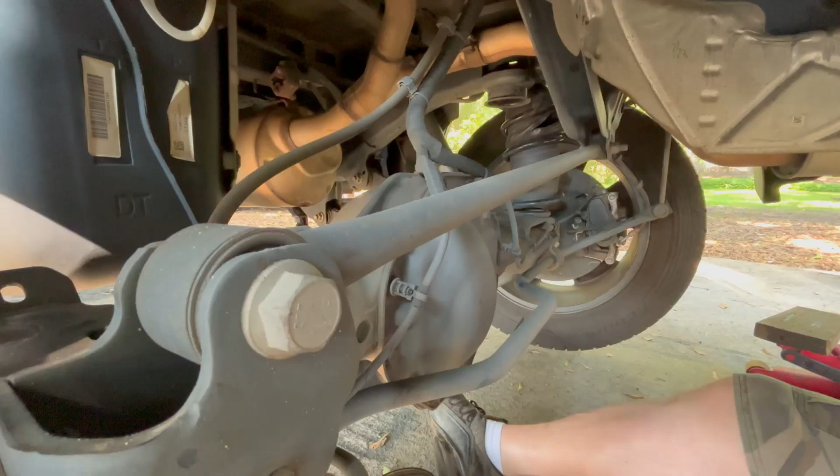Okay, so I'm gonna have to be down in here, but basically it goes from here to here, and I don't have a bump stop on this side. This side does, but it doesn't anymore. Took that out, but I gotta cut these.

Let's get you back out of here, and you can see the hole in this. Yeah, you can see it. This one never broke, never popped, but we put two on this side, two different ones, and they both popped.

So this is the kit we got from Air Lift, LoadLifter 5000 adjustable air springs. Right now we didn't get the air compressor. You saw in the last video where I worked on this, I put the air nozzle in the fuel tank or fuel door, so that's where we're going to keep it for now. There is a future kit so you can do it manually or electronically.

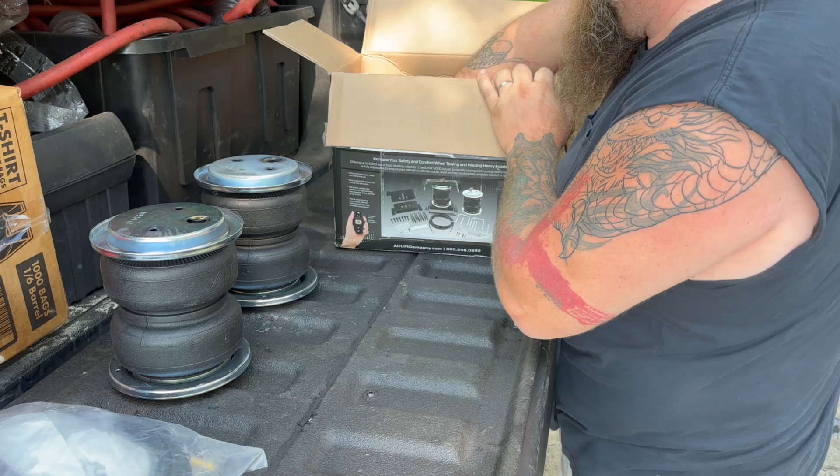Let's get in here and open this up and see what's going on. There's one airbag, there's two. There's one top bracket, that's one bottom bracket, and there's another bracket. Not sure where these go.

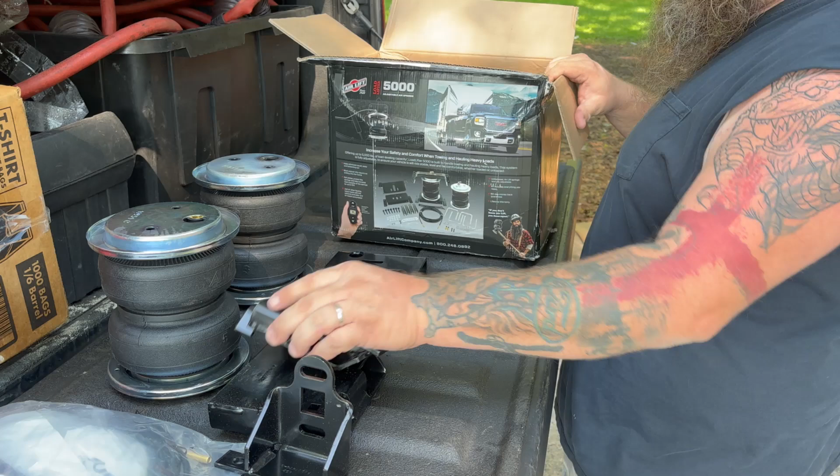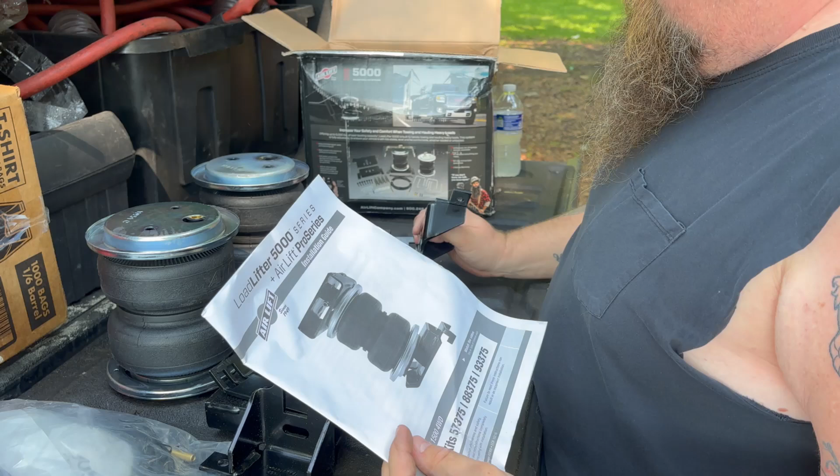You know, this one goes up, this one goes down, because the plate goes and it sits and it locks right there. Pretty sure I put bolts through here. So let's get that out of the way, get the directions. Okay, yes, I've never done one of these, so I'm gonna have to look at the directions. Let's get this bag open.

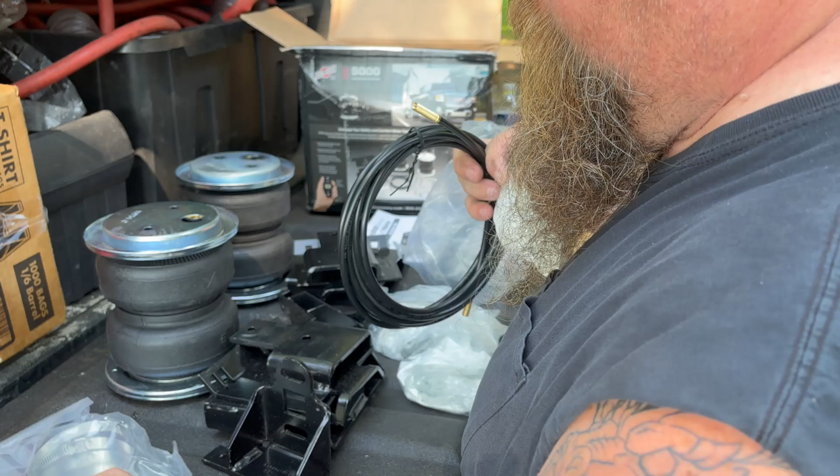So whenever you see these, that means these go up in a spot you can't get into. So you put these in there, you feed it up through, and then pull it down, and then your bolt goes on this, on the threads.

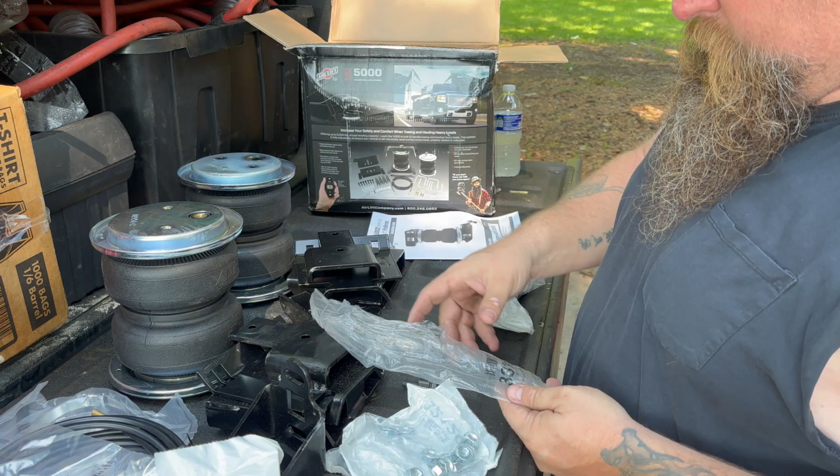There's the two valves that go right there. Not sure what that is, but we'll see. There's some nuts, there's bolts, I'm not sure what quite this goes for. It was just loose in there. Let's put that back in there because that might be a number we need. Okay.

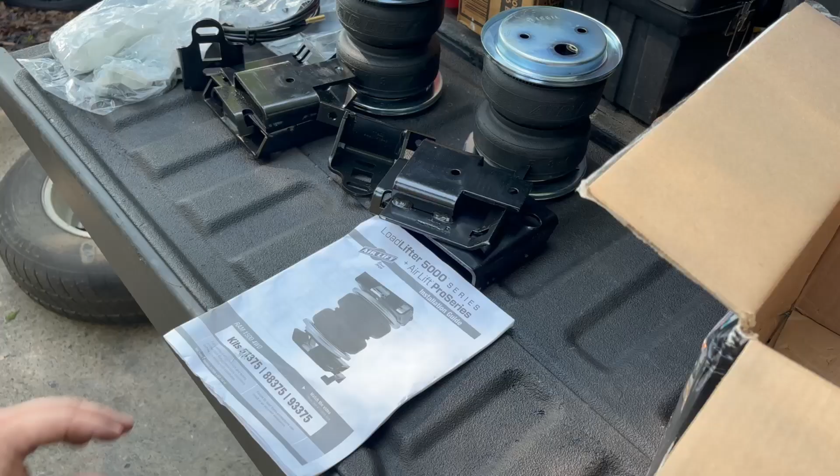I want to keep them in the bags because I'm pretty sure in the washers, lock washers, bolts, okay. I'm gonna put them back in here because they're all in that bag, or in that number, so I know the difference between this number and that number. Okay, get that out of the way.

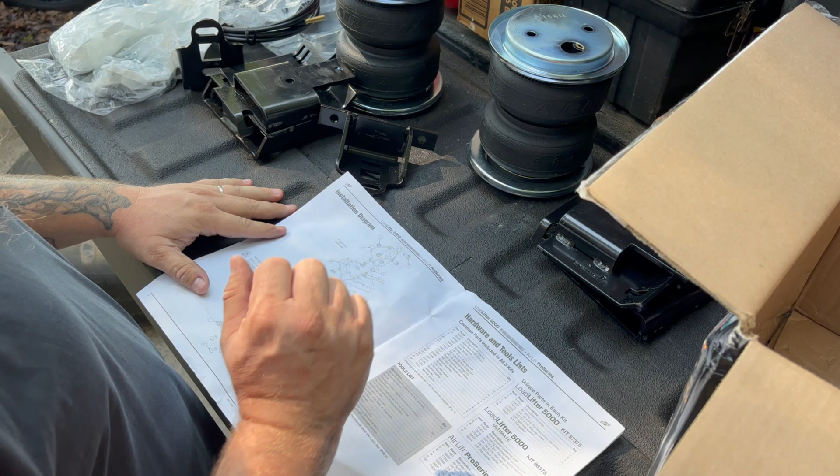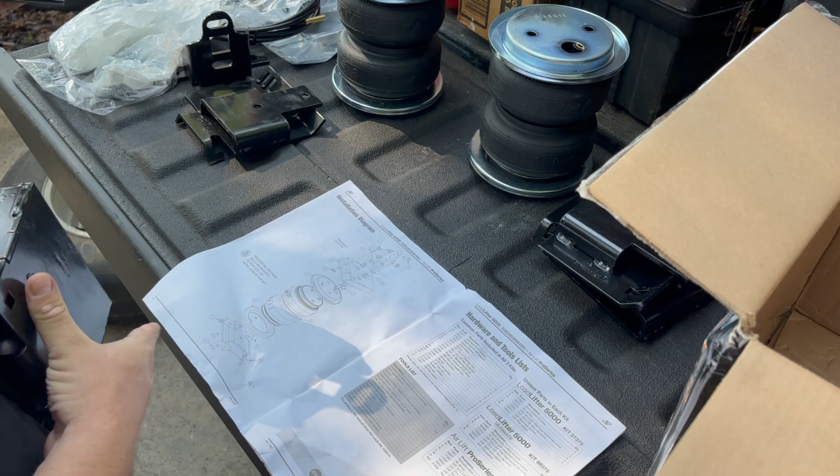Installation diagram, so that'll tell you a lot right there. So these bolts go, pretty sure this goes in the frame. This goes in the frame. And then get out of there. And then that goes there.

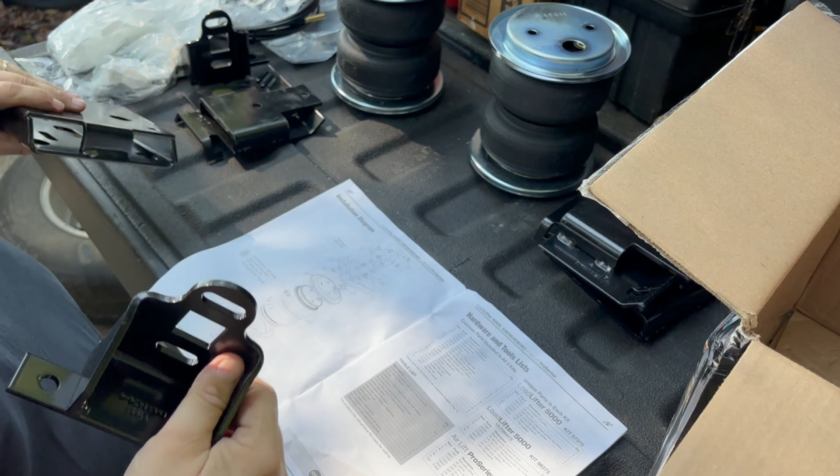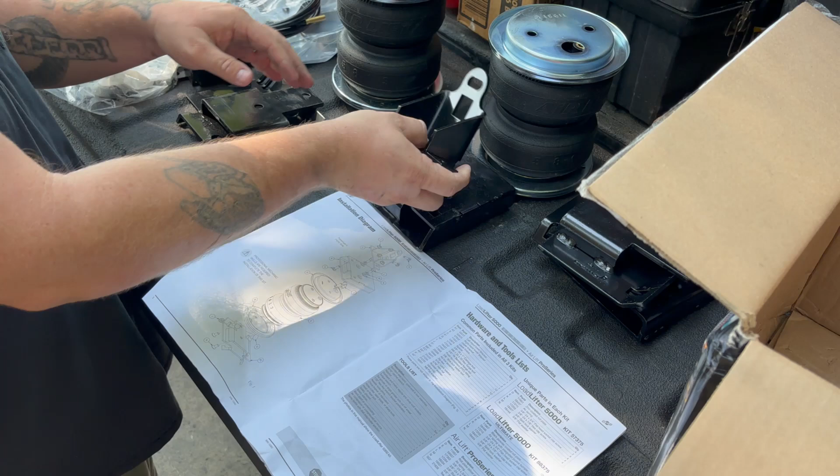In a square hole. And then, oh I see, so the nuts will come through here, boom, up through, bolt that to that, put that through. Okay, I got it.

Okay, so it says strike a line using a China marker, probably a paint marker or equivalent, on the jounce bumper bracket. And it shows here, basically you're going to be cutting it straight beside and above the bottom of the frame. Okay, bumper bracket beside and above the frame, figure 4.

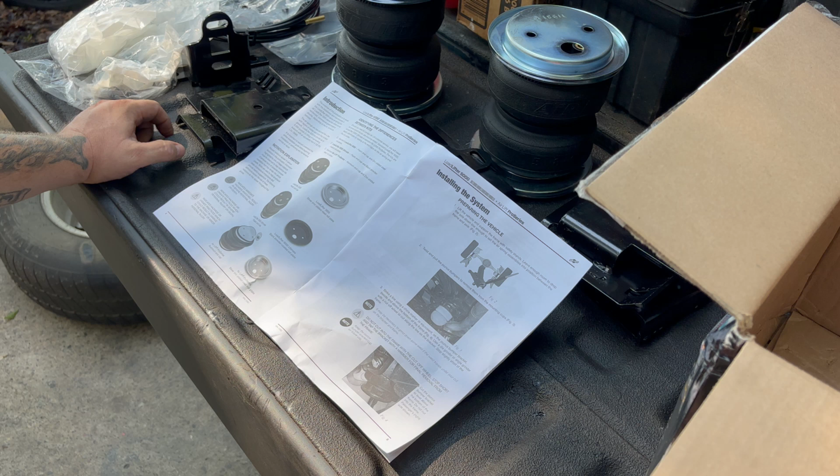Cut the jounce bumper bracket level above the bottom of the frame. Do not cut into the frame passenger side, right side shown. Okay, so trying to figure out, should do air. I don't want to do all that grinding in there.

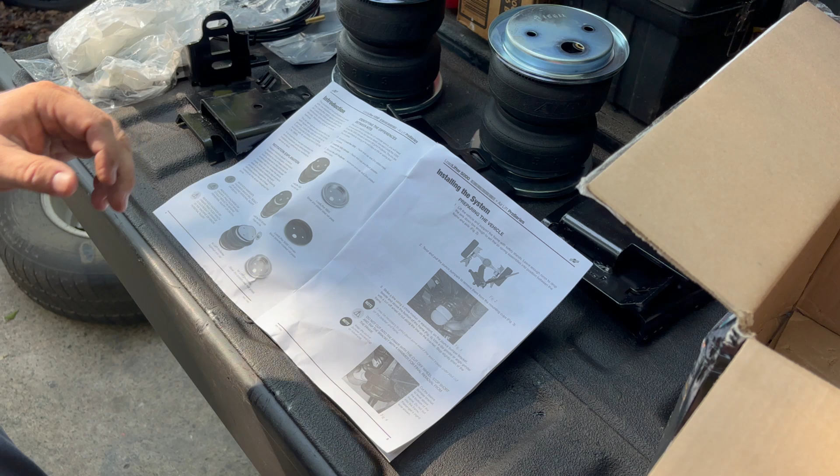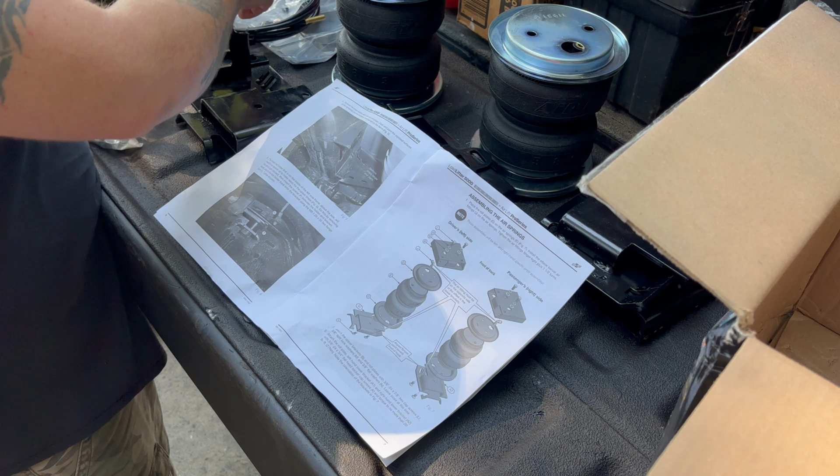Okay, so that's going to be the first step, is getting that out of the way. Oh, that's what the brake line holder that is on the inside of the left side of the frame above the axle will need to be raised up using this. Okay.

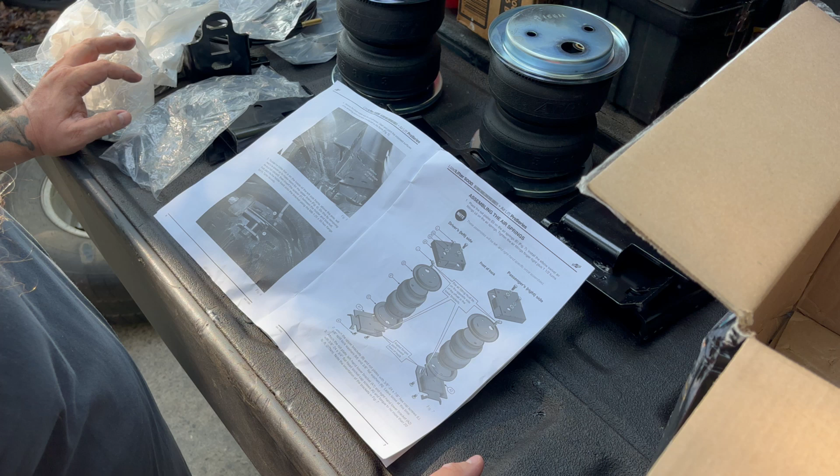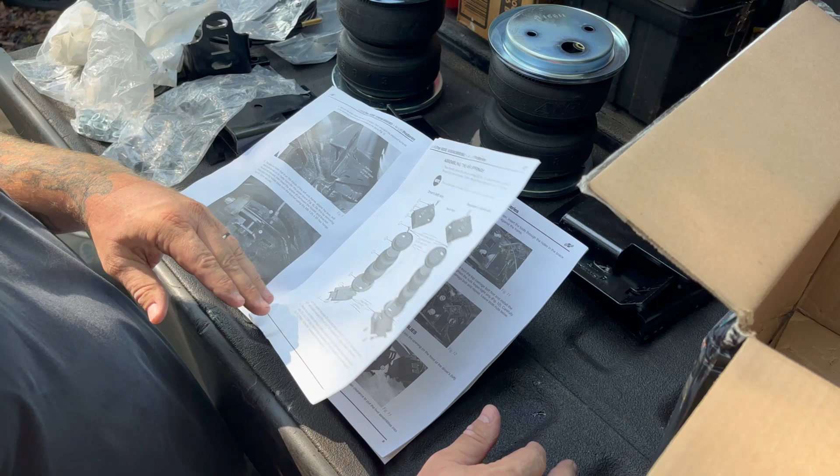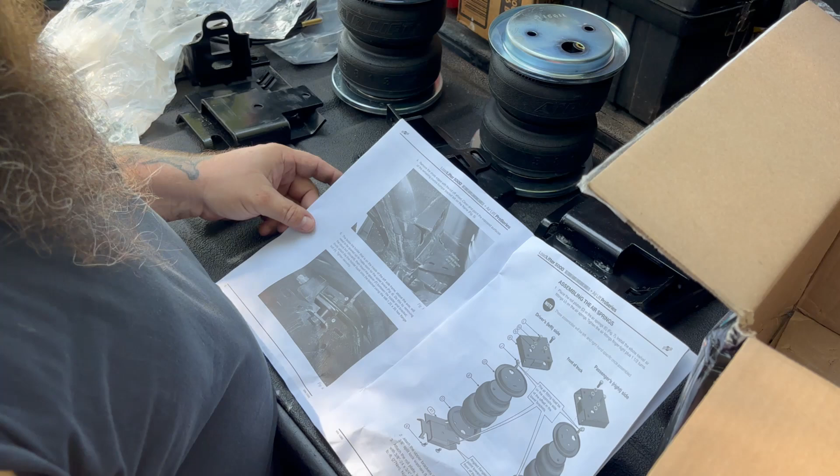Okay, so I gotta cut that, but before I get to that, I'm gonna assemble this together. Okay, and then it will get underneath. Okay.

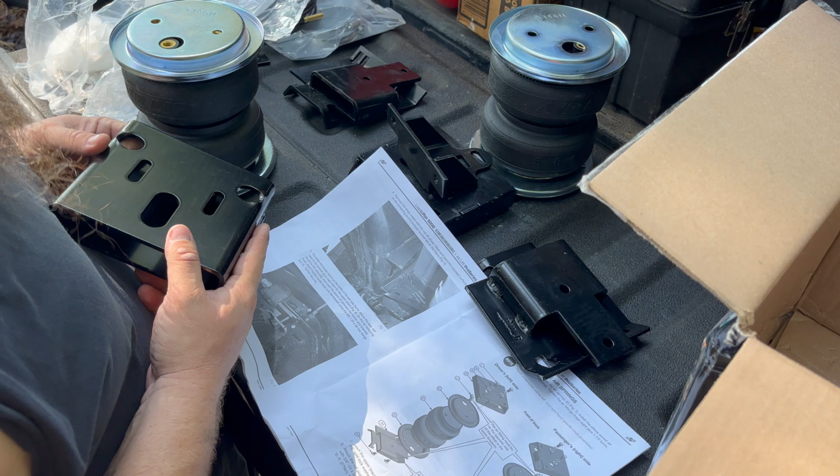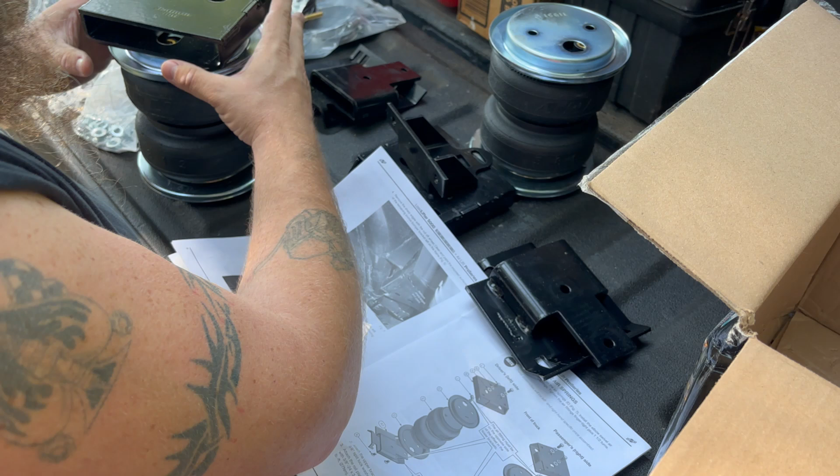So this goes away from here. Okay, that goes like that, with this out this way. Okay, so that is not going to be these, that's going to be these, these, not these, not these. Okay.

Sorry for that, I just gotta get all on the same page here. Let's open this up.

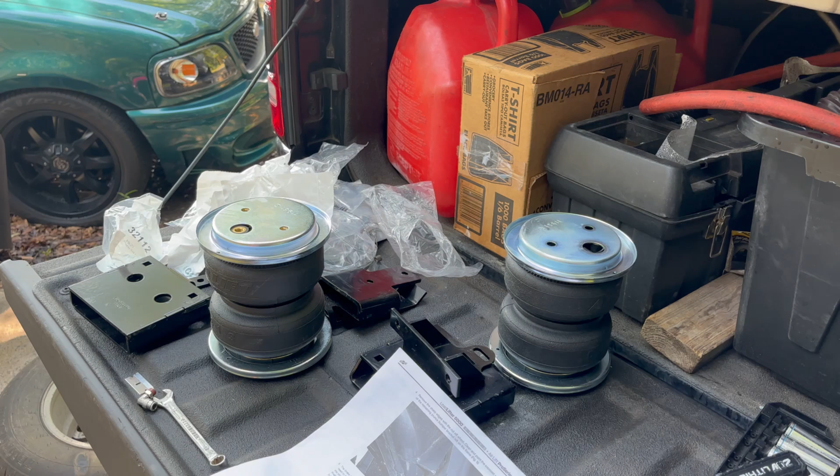Okay, so I got wrenches, I got everything I need to put this together.

Okay, enjoy a time lapse of me putting this together, because you don't want to watch me do all this.

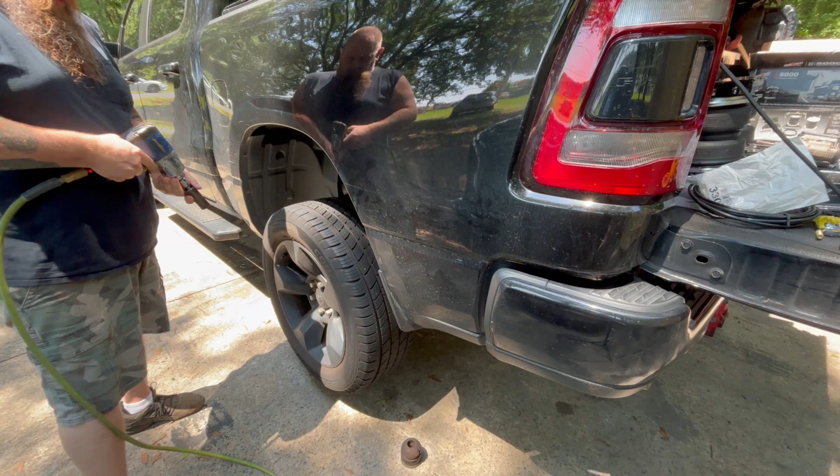Okay, so they're all together, and now it's time for underneath. I gotta do some cutting. Now I'm gonna take the wheel off so I can get to that bump stop and cut it. I really don't want to cut laying on my back.

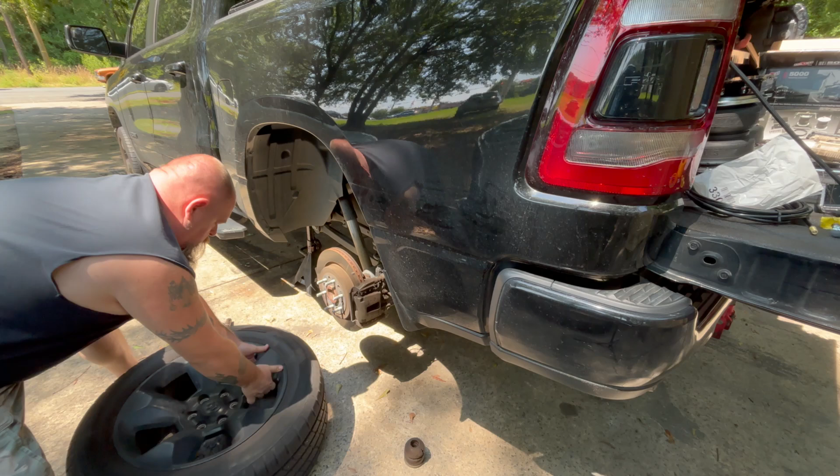Okay, so as you can see, I got cut there and there. I'm gonna try with a Sawzall, try to get in there. We'll see, might not be able to, but we'll see.

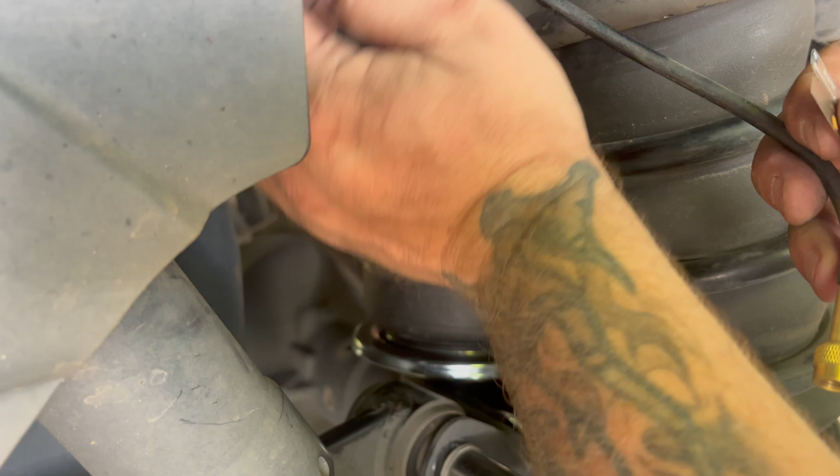Okay, so I got the 2 bolts that hold it together here, so this is all in. I'm gonna take this. So this is to this airbag, and I think I'm going to bring it down through, I don't know yet.

Okay, cut that off, don't need that. And I'll zip tie it, pull it back up, and I'll zip tie it over here like this.

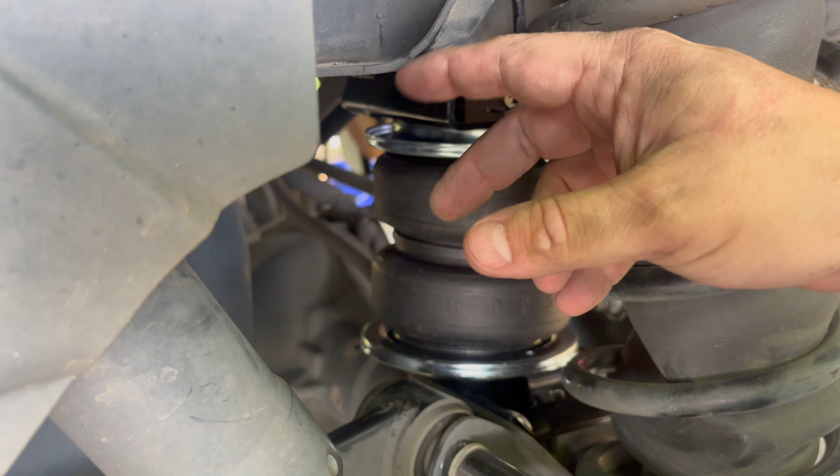So this side's in, and right here, you can't see it, but there's a hole right here where I put it through. There's a sheathing I'm gonna put here so it doesn't chafe, and I'll put a zip tie right through here.

So the only thing I got left is try to get this bolt back in. Now I gotta get the air compressor. I'll be right back with you.

So this is the passenger side. I already got the wheel off. I'm not going to show you everything because it's the same as the other side, just the same procedure. I'll be back with you here in a second.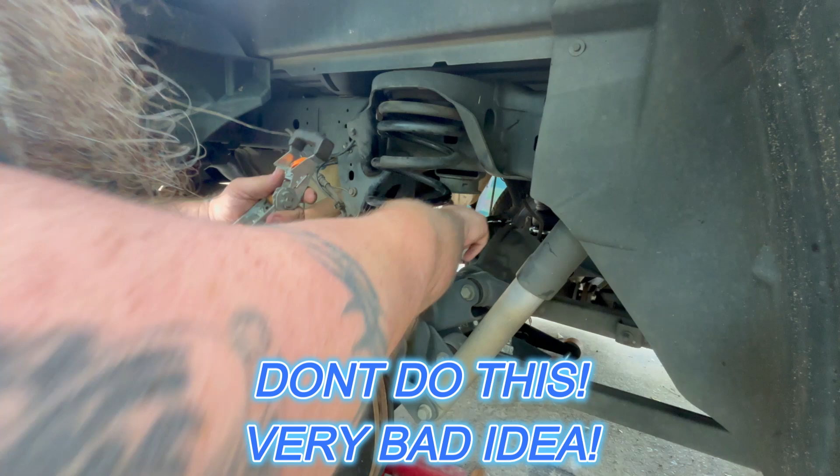Okay, I jacked up this side. It's probably a bad idea, but to get to this, can you see it? Yeah, to get to this I got this side cut. I can't get in here because of this, so I'm going to try to take this out. I do not have...

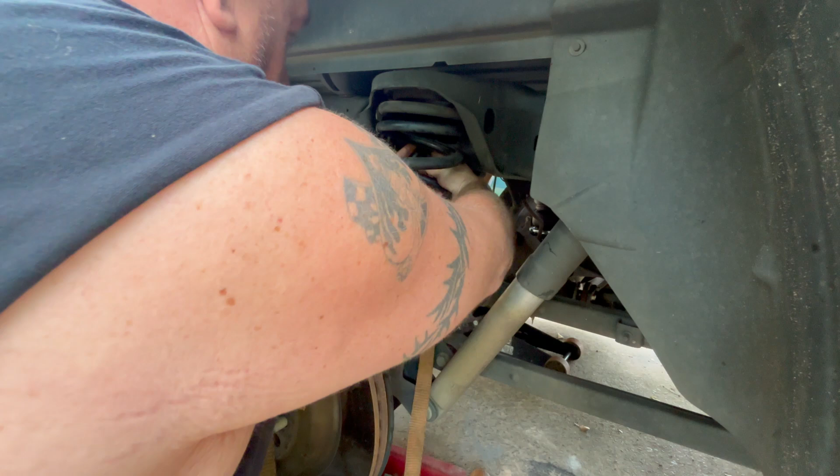May not work, but I'm going to try to clamp this.

Okay, so I got that. Now I'm gonna let this down without my face in here, because we don't want it to hit me in the face.

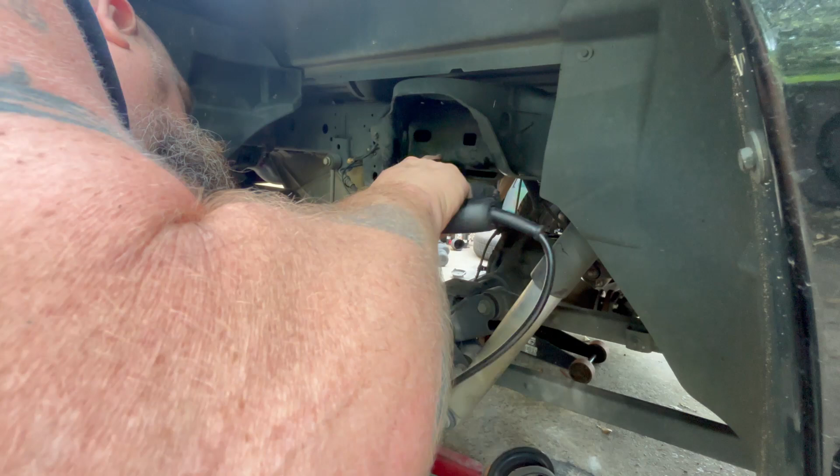Okay, so now I got this kind of in here. I've got it started. I'm gonna go in and get the bolts put through up here and get the bracket on, and I gotta go inside here.

Okay, I'm sorry, I didn't show much of the other side, I had to rush, there's a storm coming. And it's looking good. I just got to put the wheel on, put it down on the ground, and air it up and check for leaks. So I'll get back with you here in a second.